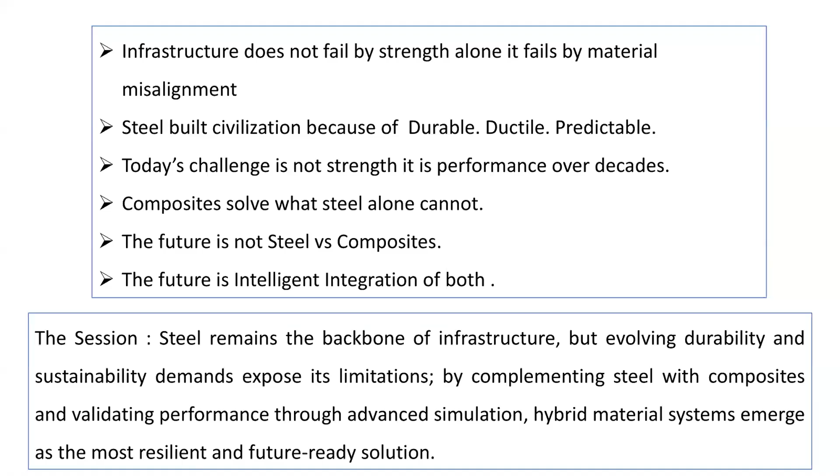So one major point we pitch for steel to be used for any project is that steel is 100% recycled material. Not a single gram of steel gets wasted, because you recycle it, you melt it. Now another dimension is added to the system, that you cannot consume more energy. So we have to consider the recyclability part also coming into the picture. So thereby steel has also taken a slight backseat when we are talking about energy consumption. Manufacturing steel is a high energy consumption activity, and the same is applicable for recycling of steel also.

So steel composite integration, we call it a hybrid system. That is the ideal solution as of now. So the role of modeling, simulations and digital tools is inevitable, and we will just touch upon the future things that are coming, or the practices advanced countries are following. In our country we are yet to catch up.

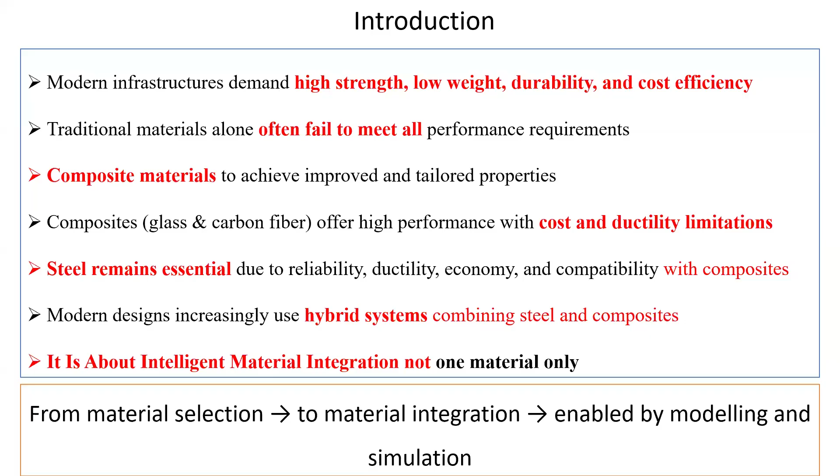So these are basically the three things you will find as durable structures enablers: the materials, the first one. Then you have to have very good design parameters, and third is the protection parameters. So all those things lead to the durability of the structures.

Now, the second one, if you see the durability with respect to the right kind of material. We only know the mild steel or the construction grades of steel. There are other varieties like weathering steels, maybe high strength low alloy steels that have higher UTS values, and those are aligned with various types of Indian standards. The mother standards are IS 2062, IS 800, or maybe Indian Roads Congress 24.

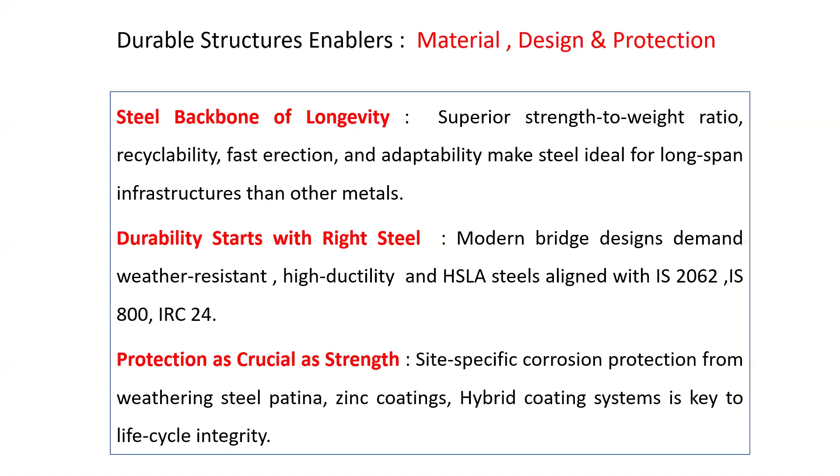So the third parameter is the protection. It is as crucial as the strength of the material, because corrosion is something like cancer to the steel. Depending on the environmental condition, you never know how corrosion is spreading inside the material, and there are cases where you can have a catastrophic failure of the materials or the structures. So these are the three things we have to consider for the durability of the structures.

Now, when we talk about the backbone of the infrastructure system, think about any landmark structure, whether it was made 50 years back or it is recent, any structure stands on these four pillars. What are these pillars? First one is the material you are selecting, or the design you are doing; it has to be very safe. That means proper workmanship and construction of the materials.

Then the durability: it has to be a good design so that whatever activity you do, you can do at ease. There are cases when you will find accessibility becomes a problem, weldability becomes a problem. So all those things are considered under that.

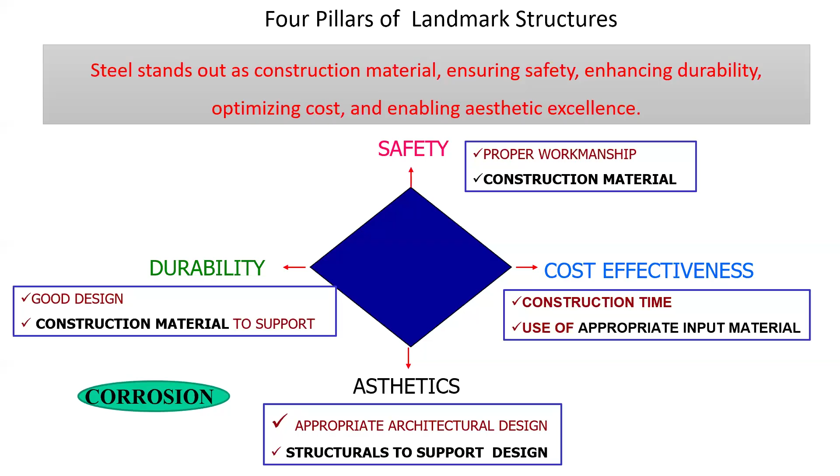And the third one, when you are going for steel-based structures, one of the prime requirements is it has to be elegant, it has to be sleek. So aesthetically it is a good one when you compare to concrete-based constructions. And the last parameter in every project is cost effectiveness. So this is how steel stands out as a construction material, ensuring safety, enhancing durability, optimizing cost and enabling aesthetic excellence.

Just a few seconds back, I talked about the Ashby plot for the optimal selection of materials. Now, this is some sort of Bible to the material scientist, because you open it and find out, because the design says that I want this type of modulus of elasticity, this specific strength. So in this chart, you will find all sorts of materials are placed. From that, you can choose the right kind of material.

Now here you can see the polymers, then the metals and the composites. In chronological order also, as the chart says, composites are at a higher level than metals with respect to certain parameters. But when you go for construction, it is not only those parameters. In infrastructure, there are other parameters that also have to be considered.

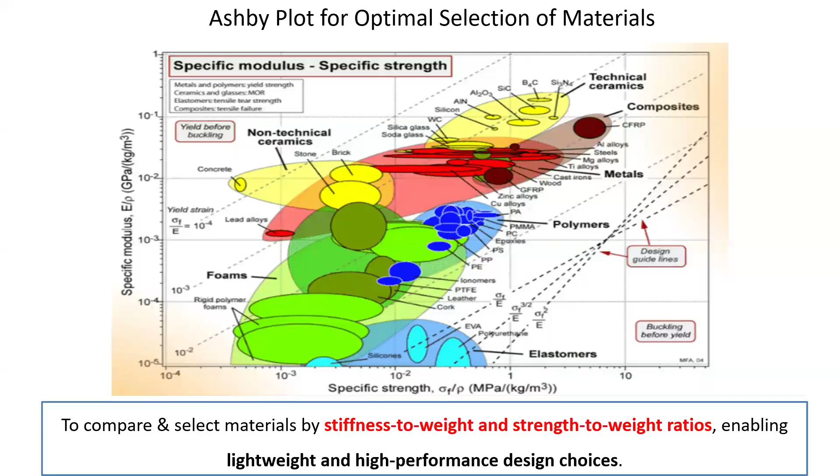So you compare and select materials by the stiffness to weight or strength to weight ratios. It is not the only criterion; it also has to be lightweight and high performance design choices. Thereby, judicious compositions of metals and various types of composites serve this type of purpose. Now all those things are done through simulation and modeling, but in earlier days this used to be done from the Ashby plots.

Now, naturally, the question can come to all of your minds: when we have a very high strength material, it becomes lightweight. Because if you see the right side, the automotive industry or the aerospace industries are using very high strength metallic materials, so it can go up to 2000 MPa.

When we talk about steel structures and infrastructures, we are only happy to use maybe 400 to 600 MPa values. Because if you go higher, then weldability and fabrication become an issue. So that is the reason it is restricted to a specific strength class. But at the same time, the moment you go for the lower strength, the weight of the structures increases.

So if there are compulsions to reduce the weight of the structures, then you have to have a mutual arrangement with the steel and the composite materials. So that's how these things are taken. So I said high strength for mobility like automotive and aerospace industries, but controlled strength for the infrastructures. The reason behind it is weldability and fabrication ease.

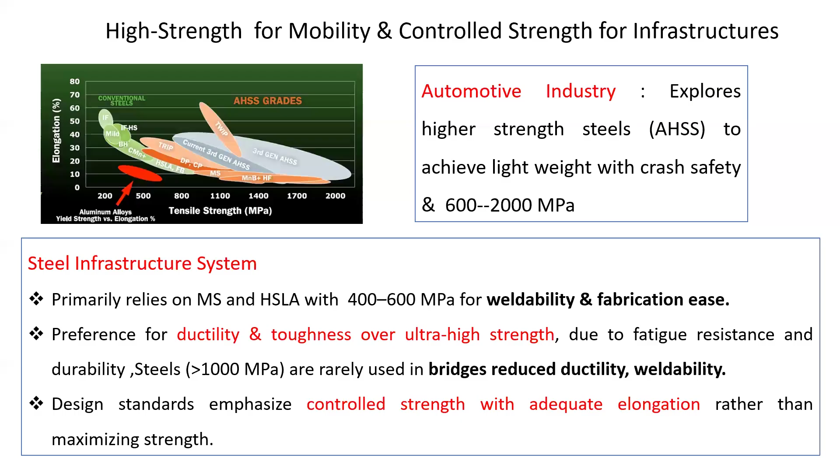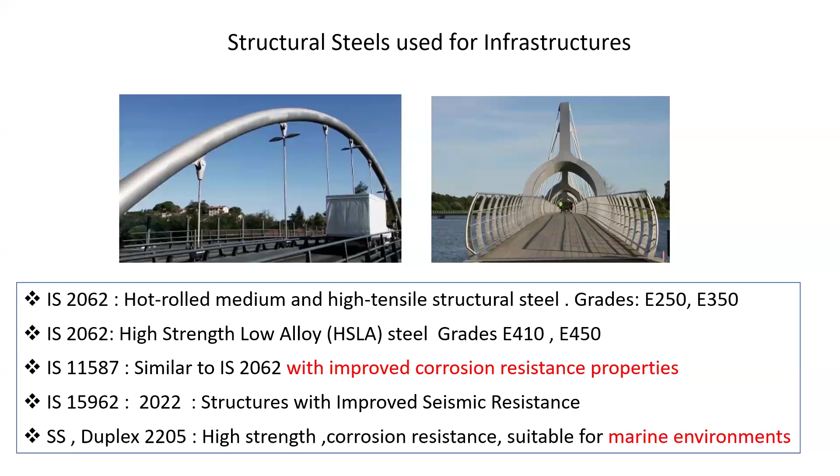Now, how are these steels made? These construction grades of steel, or any material, including the composites. You can draw an analogy: any structure you make goes through structure, property, and performance. You first know the performance the material has to give. For getting this performance, what property should the material have, and to get this property, what should be the structure? So I have just given this analogy. When you are processing composites or hybrid materials, all that methodology or philosophy has to be considered.

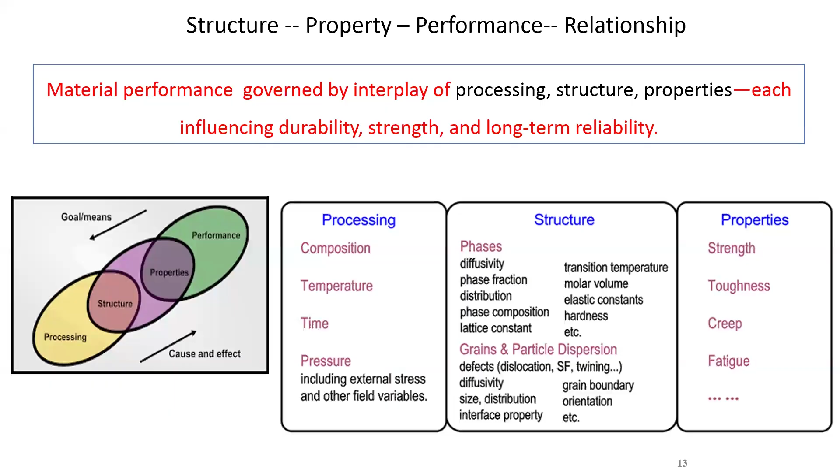So material performance is governed by the interplay of processing, what structures you achieve through that processing, and what properties you get, which leads to the performance. And that performance influences the durability, strength, and long-term reliability of the structures.

This type of information is there in our relevant codes. We call IS 800 and IRC 24 the mother codes. These are the two mother codes. I have given an extract, but nowhere does it talk about the problems present infrastructures made with steel face with respect to life cycle cost or very harsh environments. It talks about environments where you can find corrosivity categories, but not beyond that. That means you have a restricted life of the structures.

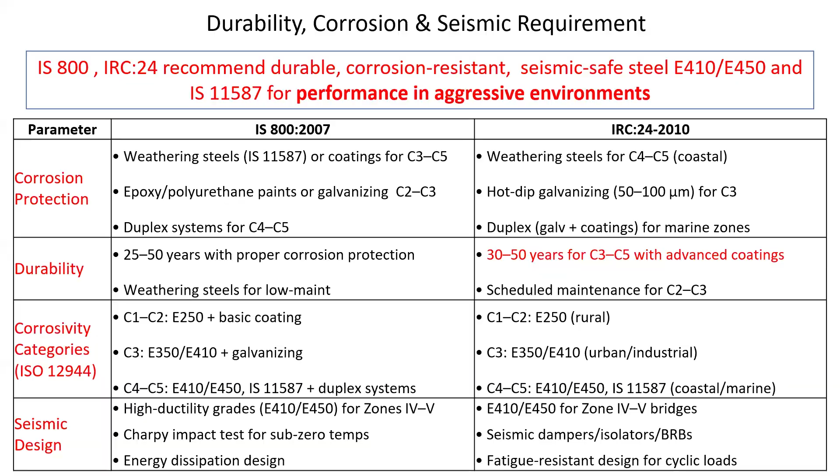So I will be taking you through various advancements where these corrosion issues have been taken care of. The high density or higher dead weight of the material can be taken care of by using various types of composites. Now, by this time you have a fair idea about why steel is used as a construction grade material, but it is not immune from corrosion. That is also known to us.

Now, let us see the performance challenges and limitations of steel structures. Steel's limitations are environmental. As I already mentioned, the material has to consume less energy, including during recycling, and it should give very high performance over a number of years. Steel cannot give all those things all the time.

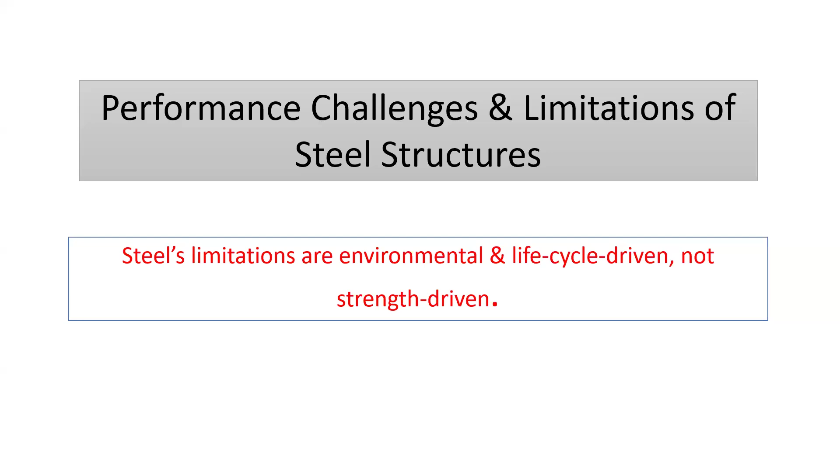So the limitations I have just noted down in one place. There are 5 to 6 major limitations the structural steels are having. What are these? Continuous corrosion from the moisture, chloride, and pollutants. That means you can ask a question: if I go for galvanized steel, if I go for galvanizing on top of that organic coating, yes, that gives a life to the structures for a limited period of time. It's not infinite.

It is not the life of the actual structure. If the steel structure's life is say 50 years, it is not giving 50 years. It may be giving 3 years to 5 years to 7 years. But after that, you have to go through blasting of the entire system, which sometimes becomes very difficult. Think about the left side images. It is made of steel, but can anybody do blasting without causing nuisance to the environment? Answer is no. So these types of challenges the existing structures are facing.

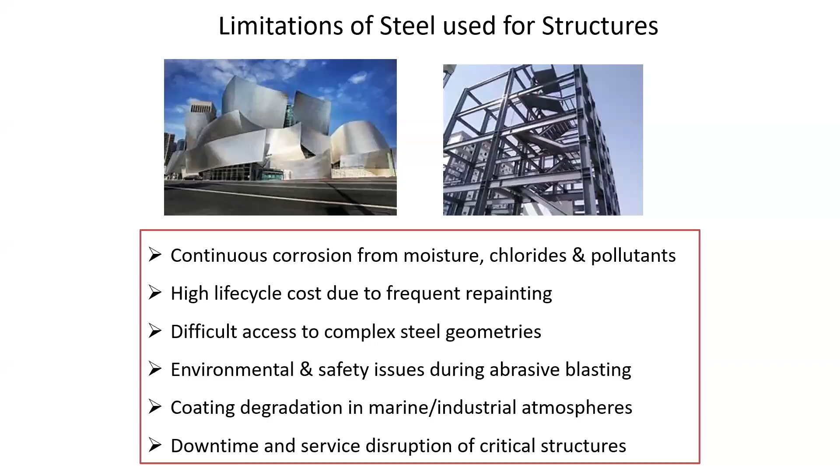So because of that, there is a shift in the thinking process, how to make infrastructures more durable, and durable for a greater number of years against a very harsh environment. The second one is very high life cycle cost, as I already mentioned, repainting, difficult access to the complex steel geometry, environmental and safety issues, coating degradation in the marine and industrial atmosphere. And every time you go for maintenance, there are disruptions or downtime of the production or maybe the occupancy. So nowadays people are very serious about all those things.

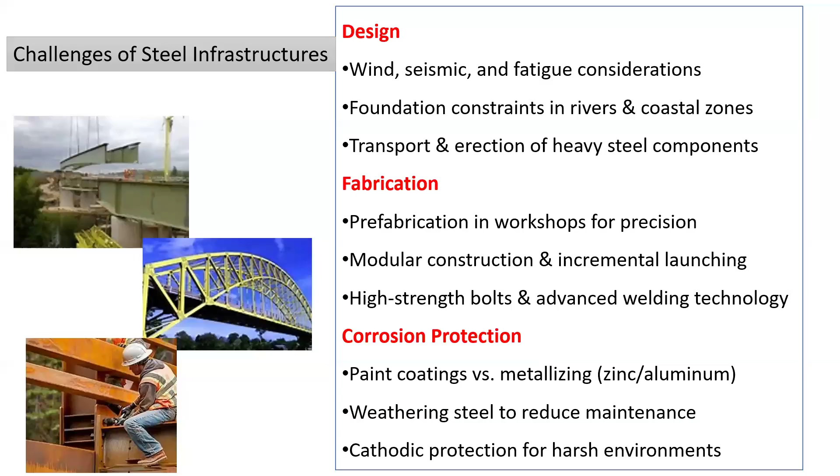Because when you see various types of complex pollutant environments, it is very difficult to address them with conventional coating systems. I mean ceramic based coatings, organic coatings, metal coatings, or maybe hybrid types of coatings. Those coatings have limited life with respect to that environment. So these are the challenges. Now, how to go ahead with that? So there are specific uses of composites, so that we get material immune from corrosion for a longer period of time, which steel alone with coating cannot provide.

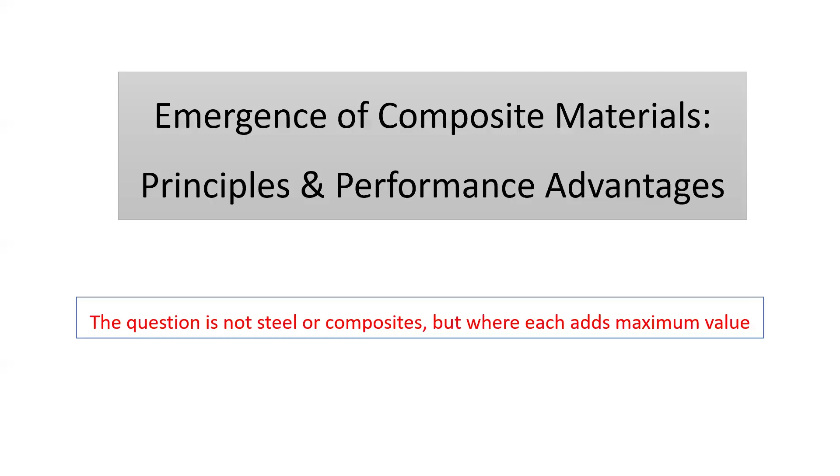So that much is about the limitations of steel. And then the composite materials. Now these composite materials are not replacing steel with the composite, which cannot be. So it is basically complementing each other so that you get maximum value in terms of the performance.

So we say it is time to look beyond steel used for the infrastructures alone. These are the points I've already highlighted: energy intensive production and recycling, escalating maintenance and life cycle cost, and highly vulnerable in aggressive environments and requires frequent inspections and repainting. So the solution is intelligently integrating composites with the steel. So infrastructures can achieve high performance and durability while significantly reducing the life cycle cost and environmental impacts.

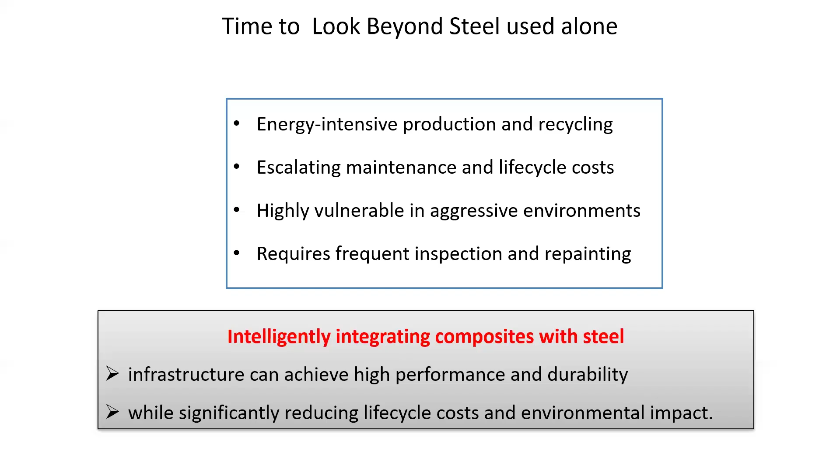Just to know a little bit about various types of composite materials. Again, I'm just giving some preliminary information on this, just to recapitulate what it is and how it is formed. Maybe a few slides may be repetitions from the last 3 days of what you have been following. Excuse me for that. So the composite material is basically an engineered material made from two or more constituents. The first constituent we call the matrix, and the second one we call the reinforcement.

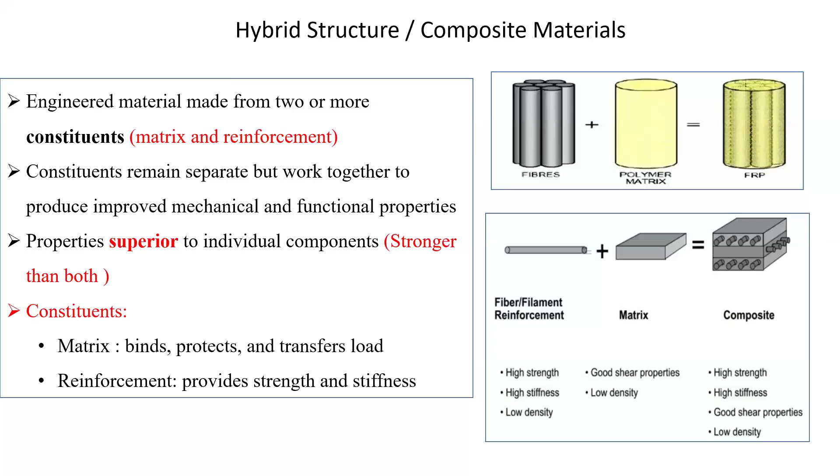So that means if you consider steel or the composites, you will find the steel as a matrix and the other material as a reinforcement. So put together, you will have better strength than the individual materials. So an ideal example is the reinforcements. Even you can see RCC, reinforced concrete. That is a very old technology, an example of composite construction.

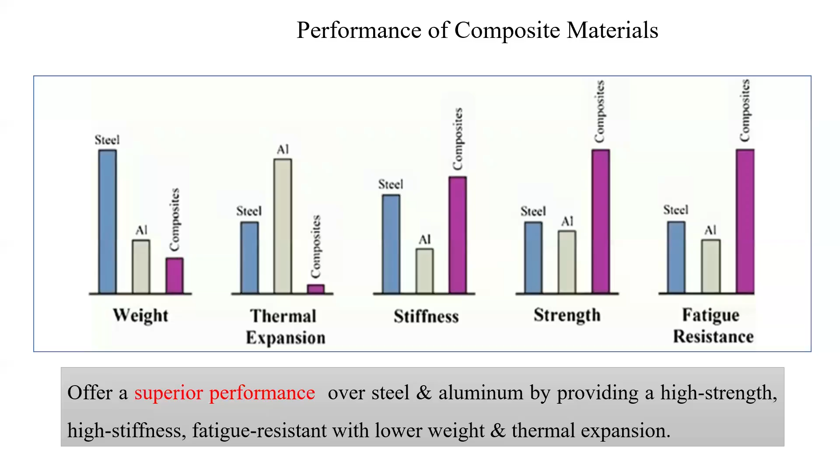Now, when you see this graph, you will understand that the two most popular metallic materials used for various applications are steel and aluminium. When you compare with some composite materials, you can see the weight, just as a comparison, thermal expansion; stiffness is very high, strength is also high, the fatigue resistance is also high. So these are some of the properties for which the composites are considered.

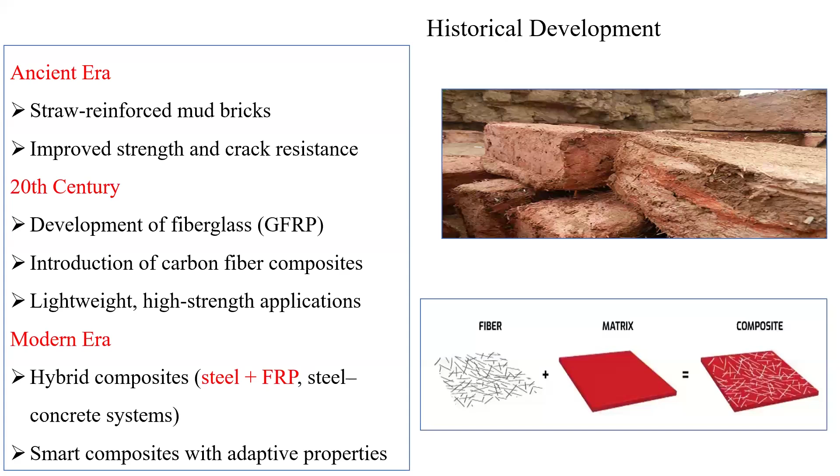Now, today we are talking about hybrid composites. That means steel and FRP, steel-concrete systems, or various types of smart composites with adaptive properties are also there. Not all those things are for infrastructure. There are various other automotive and aerospace industries where a lot of composites are used, and those are smart composites.

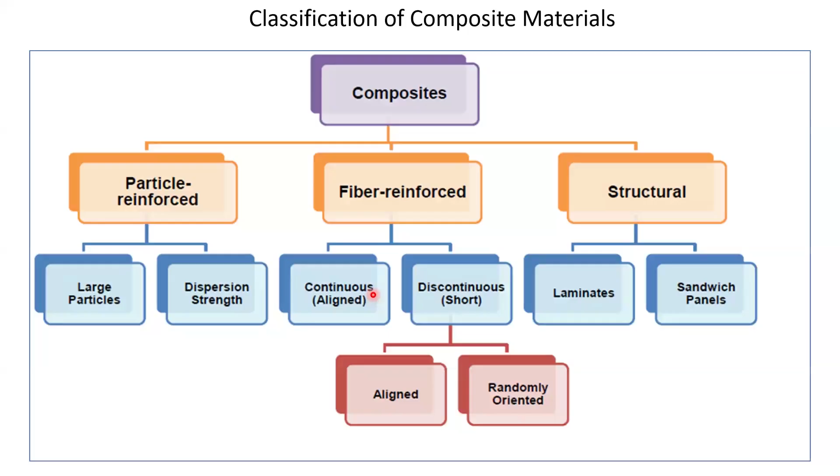The first one is a polymer. Naturally, it is lightweight, and being a non-metallic material, it has a very high degree of corrosion resistance. And being a metal matrix, you have very high strength and temperature resistance. When you are going for ceramic matrix, you have excellent high temperature and wear resistance. So depending on the situations and the applications, you have to choose the matrix for the composites. That's what you will find for aerospace or thermal protection systems. We use silicon carbide or alumina, that type of ceramic material as a matrix, so that you have a very high degree of temperature resistance.

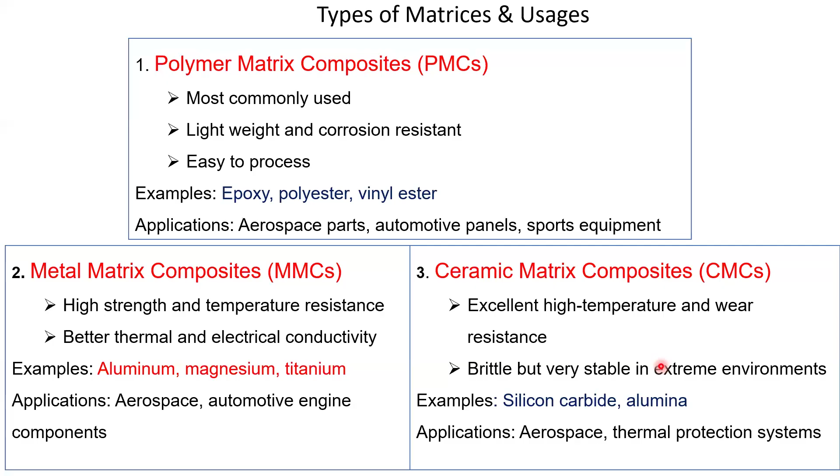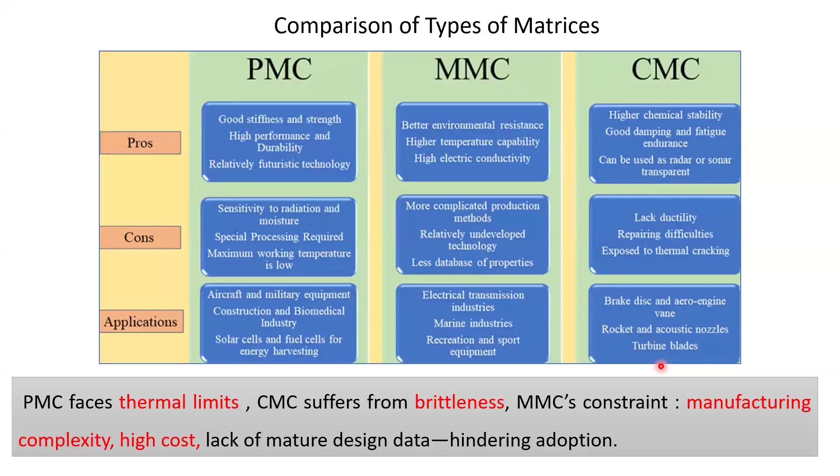So that hinders adoption, because people are always looking for identical design and manufacturing easiness, so that the material can be fabricated and fixed to the system. In the absence of both things, it becomes difficult to implement that type of technology for the infrastructures. So that part is the matrix.

Now the second ingredient is the reinforcement. What are the reinforcements? There are three types of reinforcements normally used. So this is the second constituent. We call them fiber reinforced composites, particle reinforced composites, and structural composites. As I already mentioned, the structural composites are basically sandwich panels and laminated composites. These are used mostly for the infrastructures. And fiber reinforced composites, this is again the reinforced concrete. There are glass fiber reinforcement bars.

If you search in Google, you will find in India there are a few metro railway constructions, mostly in the Delhi area, that have been using glass fiber reinforcement bars replacing steel reinforcement bars. There are certain reasons behind that, as an experiment, and as of now the structures are not stressed. But there are issues for the fabrication, and it is not very popular in our country. So fiber reinforced composites, that is one area.

The fibers may be continuous or discontinuous, but when you are talking about RCC based construction, it is continuous, because the fibers have to carry the entire strength of the beams and columns, or maybe the decks. It is basically continuous. Coming to the particle reinforced composites, it improves hardness and wear resistance. And the last one is the structural composites, built from layered sandwich structures designed for load-bearing applications.

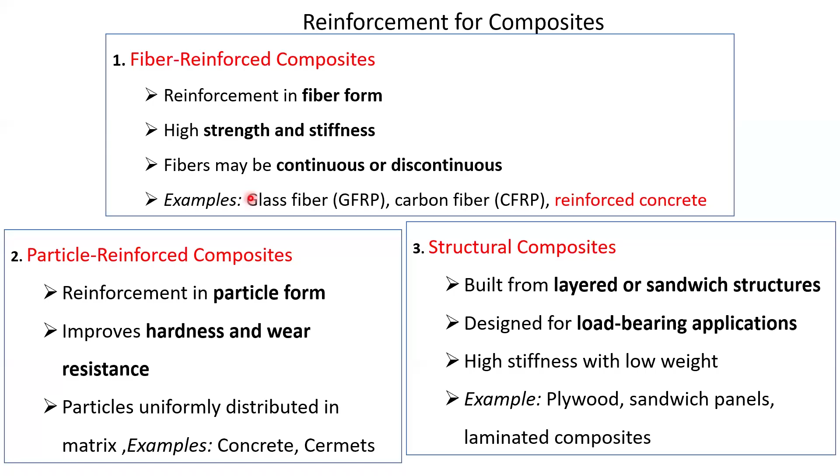High stiffness, the low weight, and this fiber reinforced component. Now you have seen the three types of reinforcement component: fiber, then particle, and then structure. If you go to the fiber, it has got again two types, as I already gave an example with the reinforcement. So the continuous fiber or maybe the discontinuous fiber, it has got its own advantages and disadvantages.

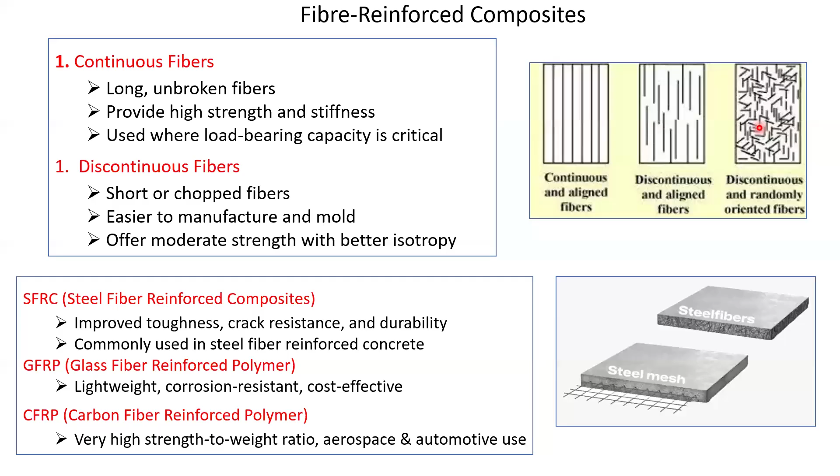The right side, I need not explain. These are self-explanatory images: continuous and aligned fibers. You can see the discontinuous and aligned fibers, and the discontinuous and randomly oriented fibers. So these are the three types: continuous, discontinuous, or discontinuous randomly oriented fiber. This also can be arranged during the manufacturing process. So you get still better property with respect to the discontinuous, because in discontinuous it is aligned. Here it is random, that means it has got more resistance, so it gives the better strength in some cases.

The second and third types of reinforcements are the particle composites and the structural composites. Particle composites, you see, provide very high compressive strength and durability. An example is the cement matrix. In the cement matrix, we give the sand and the stones. So that becomes the aggregate particles. So sand and aggregate particles and cement matrix become a classic example of particle composites.

As I said, out of these three types, the structural composites are basically used as of now mostly for buildings, bridges, marine and automotive structures, and of course for the aircraft panels. Aircraft panels means the wing and other places, we call them the honeycomb structures. There all these composites are used.

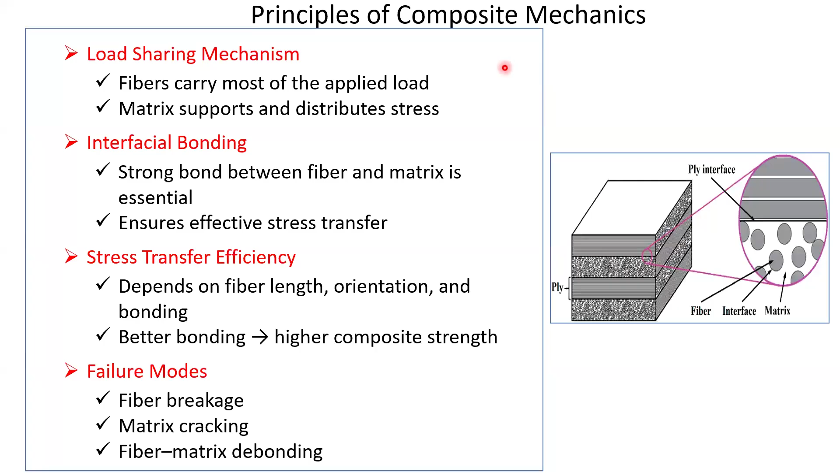So the failure modes of the composite, just now what I said, you see this is layer to layer. If the interlayer bonding is not enough, you have delaminations, you have debonding, you have matrix rupture, and others like pull out, and the fiber ruptures. In the earlier slide, what I have shown here in this image, those things have been exploded, and it is shown like this.

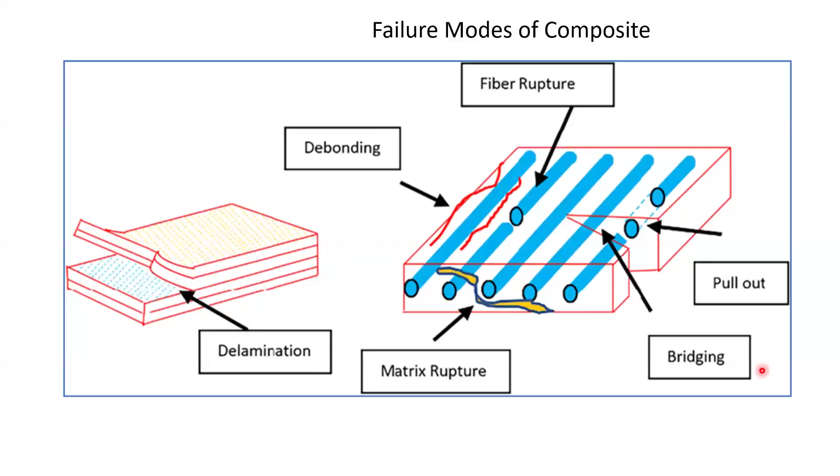As I said, the manufacturing is very difficult, just to find out its structure versus property versus performance. So it's a very difficult job to design a composite material to serve the purpose. So we always follow the rule of mixtures. The rule of mixtures is basically to predict the mechanical properties of the composites based on the properties of the fiber and the matrix. We take this type of fibers, this type of matrix, and there is a ratio of that. It strongly depends on the volume fraction of the constituents.

So it is an important tool for design and optimization of the composites, and increasing fiber volume fraction generally increases the strength and stiffness. It assumes perfect bonding and uniform stress distribution. That is also to be considered. So it is not so easy. It seems very easy: go into the rule of mixtures, take proper ratios, search the literature, put both things together, and start making the composites. Not so easy. You have to find out the optimum level where your desired properties are achieved.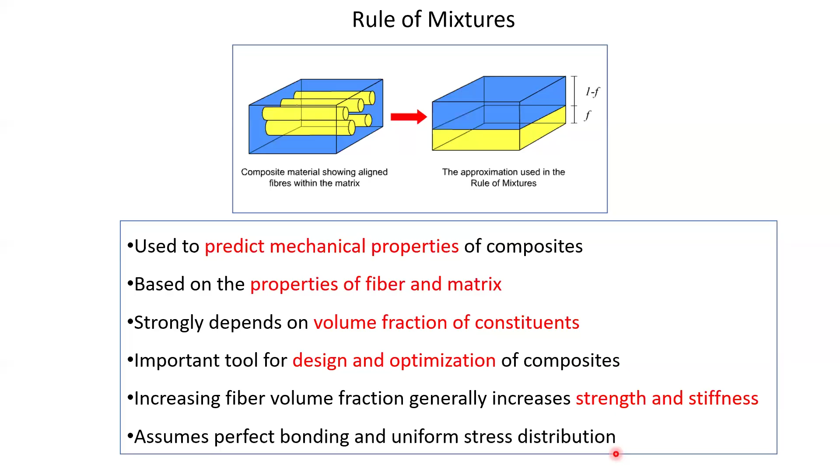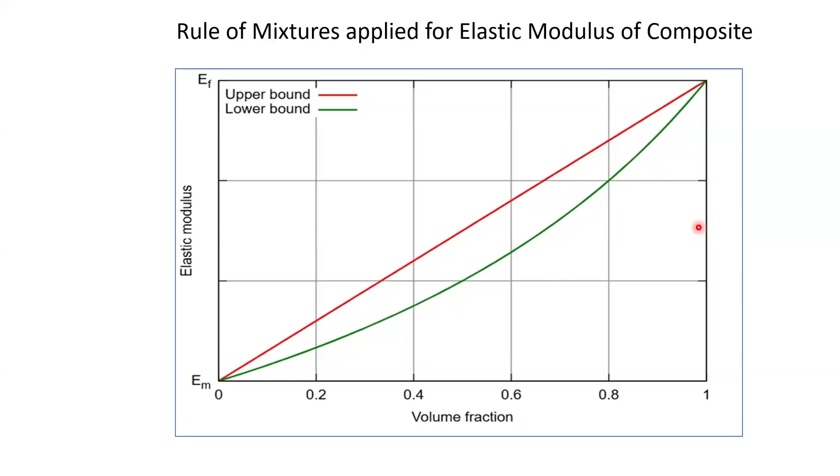Now, if I take you to the next, you will find how difficult it is; you have to continuously make these types of charts, the rule of mixtures applied for the elastic modulus of the composites. There you can find there is an upper bound and a lower bound. You have to find what strength you want and what elastic modulus you are achieving at that point. Depending on that, you have to do continuous experimentation to finalize the rule of mixtures. That means what should be my ratio of matrix and reinforcement, and then other parameters come in: what is the strength, what type of reinforcement I have to provide. So making all those things into a system is very complicated.

Now, if you see this, as I said earlier, there are three types of composites: the PMC, MMC, and the ceramic matrix composite. If you compare with conventional materials, the temperature capability increases from polymer to ceramic. As I said, in the ceramic you have a lot of ceramic materials, and due to those ceramic materials, the temperature retention is very high.

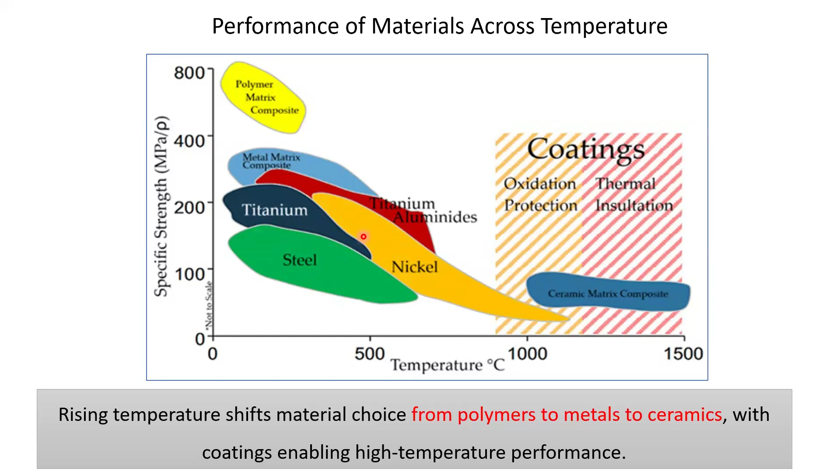So this is another chart from where you will find the specific strength of the material at elevated temperature. Steel loses its elevated temperature strength the moment it crosses maybe 450 to 500 degrees centigrade. Thereby, to retain strength up to 450, you need a fireproofing coating for the steel. But when you develop a component in such a way, that type of coating may not be required, because the composite takes care of that part. The same logic goes for various types of analysis. I'm just giving some of the idea behind composites.

When you compare life cycle cost for a 20-year projected life, you can find that initially the composite cost is higher, but at the same time installation cost is lower, maintenance frequency is reduced, so maintenance cost is low, and the replacement and downtime cost is almost negligible.

So thereby it scores over the steel based constructions. And the same way, I have already mentioned why the Delhi Metro has used it, and the answer is here: the glass fiber reinforced polymer reinforcement bar is used because it emits low CO2 during manufacturing. So that is the reason, and it has other advantages. Though joining was the issue, there are various systems through which you can join reinforcement bars continuously one after another, so it becomes a continuous reinforcement.

So it shows significant reductions in CO2 emissions when GFRP is used, particularly at the optimized spacing. This is again some analysis I have taken from the internet, and that report says this is the reason for this.

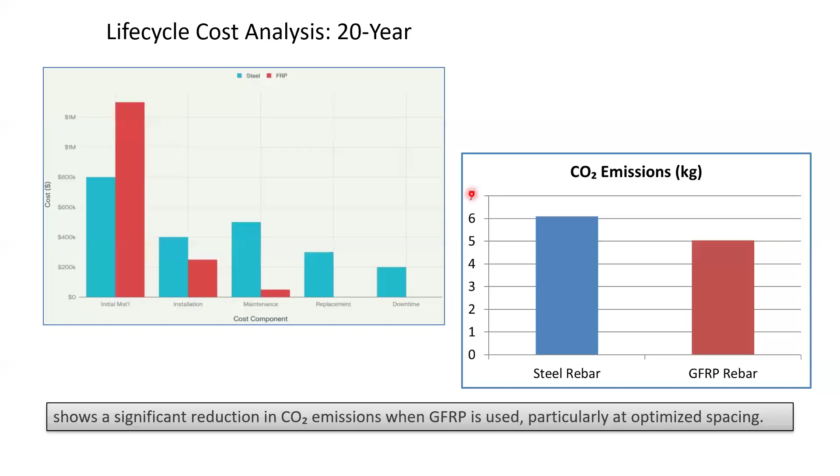So just to summarize this composite part with a few slides, then we will go to the hybrid systems. This composite is stronger than metals for the same weight, which you have seen in the earlier chart also. It has resistance to corrosion and environmental attack, is lightweight for design efficiency, and maintains performance under repeated loading, meaning it has better fatigue resistance. And on the right side you can find various types of reinforced composites with respect to steel and high strength steel.

So this is again one of the equations: FRP plus steel equals lightweight efficiency with ductility, safety and long-term durability. So this is how you can compare; the FRP, fiber reinforced polymer, is always better with respect to steel and aluminum.

So these are a few charts I have put. This is not to be discussed much. The only thing is the advantage of the composites, FRP. If you see this, with respect to corrosion resistance, yes, it is good. Weight, yes, it is good. Strength to weight ratio may be higher than steel. Installation time and cost, maintenance needs, lifespan, thermal conductivity, design flexibility, and environmental impact. In all these areas you will find FRP is better than conventional steel,

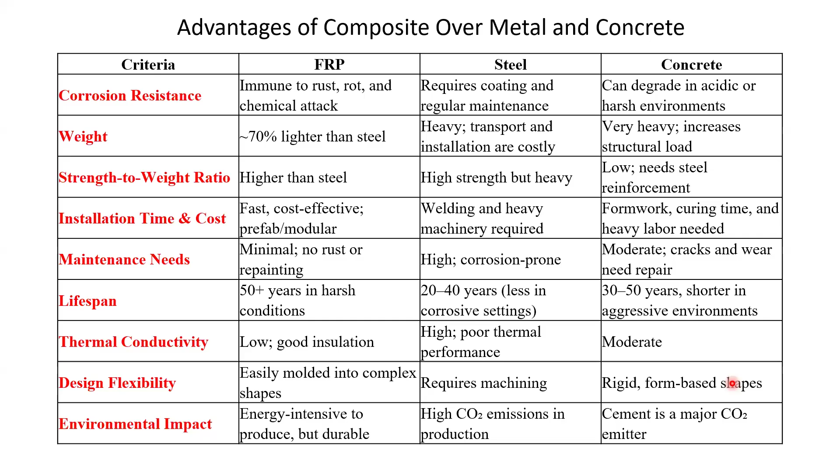but the only thing is the manufacturing part is an issue. And in industry, in all these calculations, people are only seeing the cost of the material. If the cost of the material is higher, people don't consider the hidden cost. In our country we are still not adopting life cycle cost analysis as the basis for selecting material. In life cycle cost analysis you have to consider each and every aspect: the cost to society, the amount of energy it consumes, and when it goes into recycling or dumping, what difficulty it gives to society. All those things are calculated. There are no regulations to consider it, but as of date it is a good idea to go for it whenever possible.

So again, I've already talked about the energy absorption capacity. In the right side photograph you can find steel connections versus GFRP connections. The energy absorption capacity gives better protection in seismic applications. The material can consume more energy; it can take more shocks. So for seismic zones also, these composites with higher energy absorption capacity than steel can be used for components in areas that need that type of support. So for seismic resistant structures abroad, people have started using various types of composites to take this type of advantage.

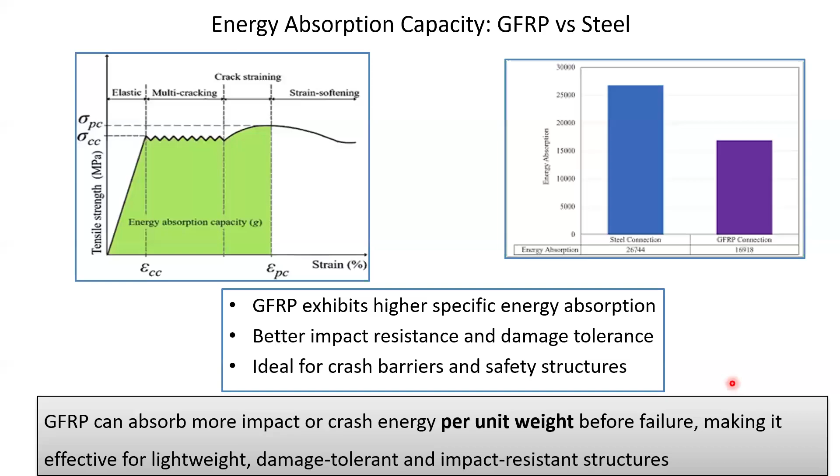On the left side you can see some of the engineering applications where composite materials are used: high performance resins, adhesives, carbon fiber based materials, lightweighting, advanced polymer composites, biomaterials, nanocomposites, smart metal composites, additive manufacturing, circular material economy, and intelligent design manufacturing. So I'll just keep this slide for 30 seconds. Just go through it, and then I will go to the next one.

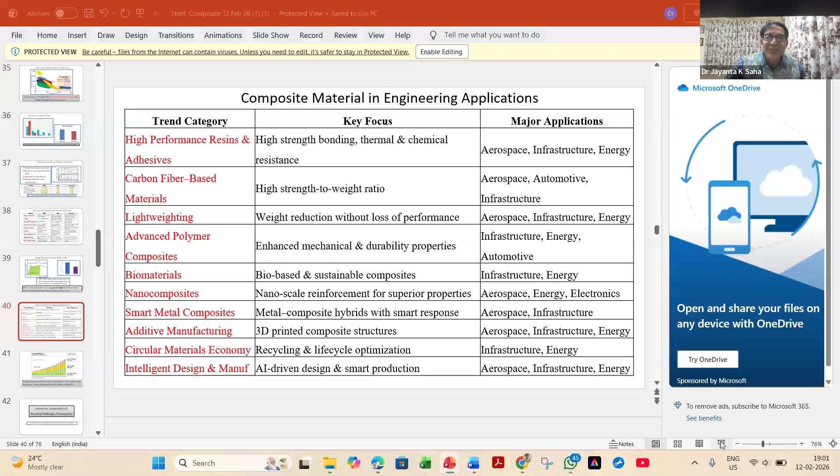problems... If you talk about infrastructure, yes, there are areas like crash barriers for all the national highways. It is not only steel, because steel has got its advantages, but non-metallic materials made with composites are also a part of crash barrier systems, so it gives better performance in case of casualty. So people have started using it in these types of infrastructure areas, but not in high intensity.

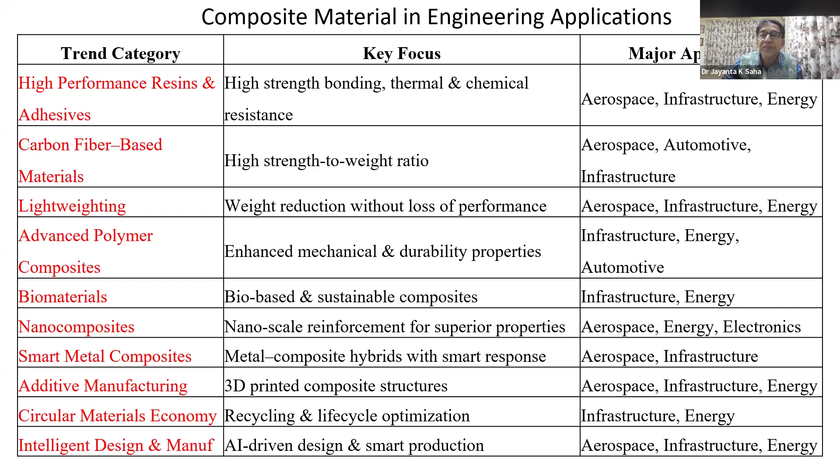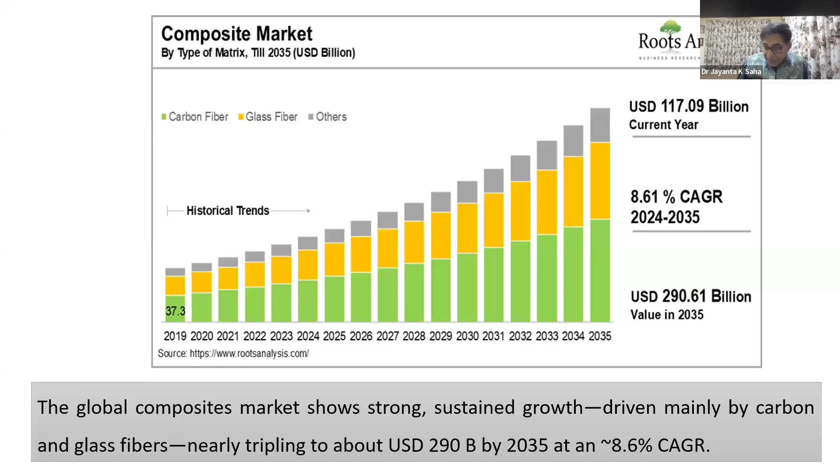Now, we talked about so many good things about composite materials, but yes, there are certain drawbacks in composites. Maintaining the high performance brings new challenges. What are the challenges? I think somewhere I mentioned that recycling is an issue for composites. Now, number one is the cost. The manufacturing cost is very high.

If you're going for very high-end, high performance composites, there is the complex manufacturing process, and inspection difficulty: detecting internal defects or micro cracks is harder than in steel structures. So the inspection methodology for composites in service is also evolving. But in steel, various types of gadgets are available. Through that, you can detect, like

in RCC based structures, you can find out, you can repair it, or even steel structures. You can do in situ metallography. You can check various types of mechanical properties, and you can provide suitable retrofitting of the system. But in composites, yes, those are the areas still being worked on.

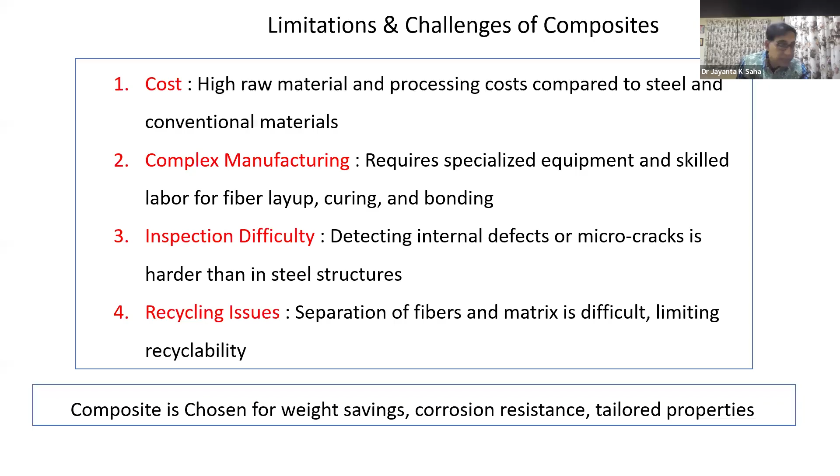But the bottom line is that composite is chosen for the weight savings, corrosion resistance, and to give tailored properties. Because of these three major criteria, composites are still used, though they have about four limitations. So I call it a paradox. It is a very good thing; it provides high performance, but at the same time it produces waste which basically cannot be recycled.

The lower embodied energy and carbon footprint are the positive points: high strength-to-weight ratios, good corrosion resistance, reduced maintenance and extended service life, widely used in infrastructure, transport, and renewable energy. But thermoset composites pose serious end-of-life challenges, and the global GFRP market is growing, as you have seen in the earlier slides, up to the projected figure for 2035. And wind turbine blades are the major contributor to composite waste.

In India there are not many wind turbines; there are 2-3 companies that manufacture for Indian installations. But in developed countries, in Europe and America, there are a lot of wind energy installations. I have some figures on how many wind turbine blades will be discarded by the middle of this year, and there are limited recycling routes for thermoset composites.

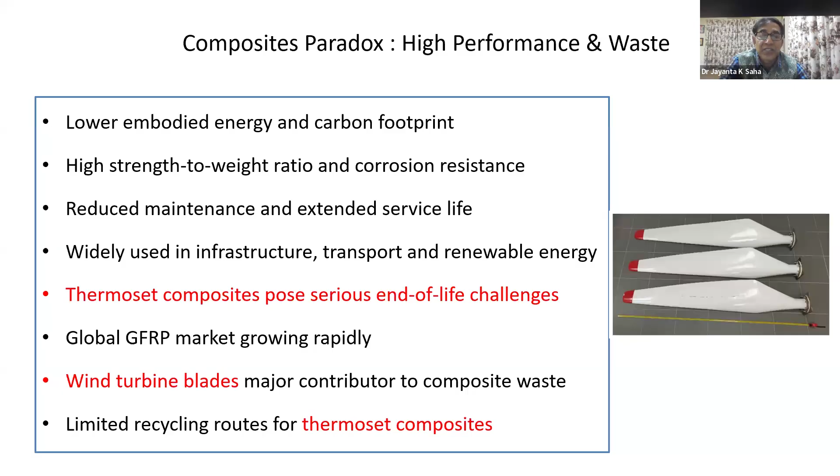So on one side it is good, but at the same time there are some issues. For that, the technologist has to think it over. Should we use it further unless we find a proper solution for the recyclability of these composites? Should we go further or not? So that is a question.

So the challenges: thermoset polymers are cross-linked and non-meltable. That is the key word, non-meltable. Conventional recycling routes used for thermoplastics do not work. End-of-life management remains a major sustainability issue, and the market projection you have seen earlier. And now this is the figure I'm talking about: 19,000 wind turbine blades are expected to be retired by mid-2026, because they have a fatigue life.

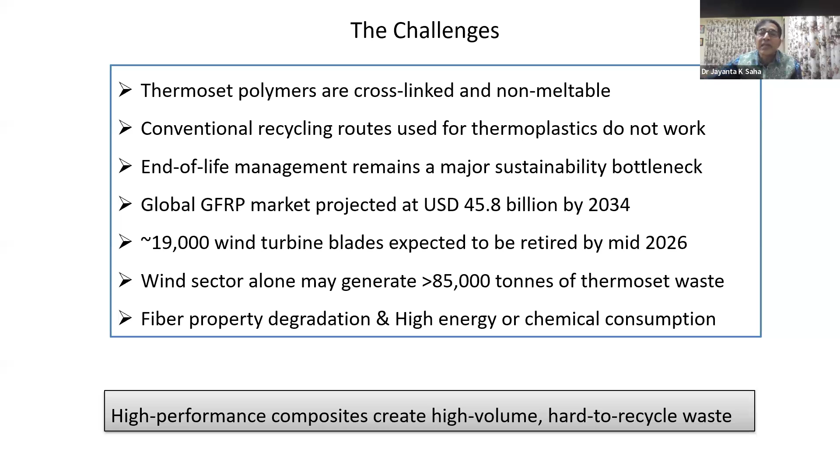The fatigue life is so many lakhs of cycles. The moment it is completed, because of the safety requirement, wind turbine blades have to be discarded. And it creates huge waste which cannot be recycled. The wind sector alone generates 85,000 tons of thermoset waste. So this is the issue, and we consider this a challenge for using composites. Having said so, this type of material cannot go directly into infrastructure.

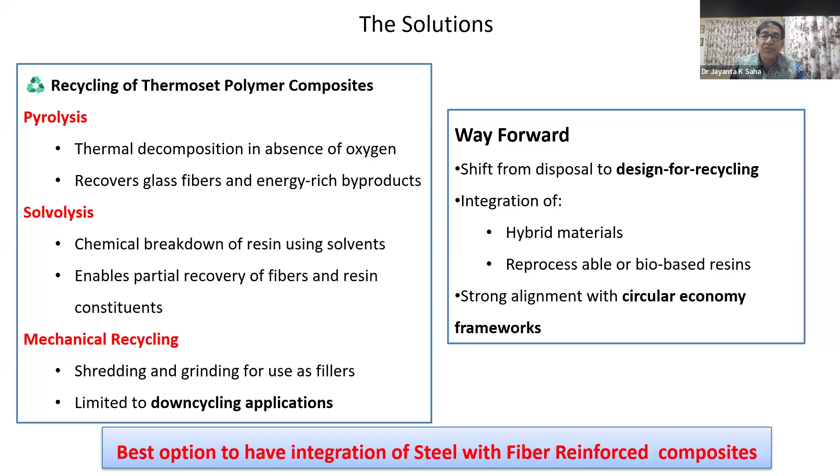Now, the solution is that there are very costly recycling processes industrially, but they're not at commercial scale. We call them pyrolysis, solvolysis, and mechanical recycling. But there are issues with these. When you compare with steel, it's highly recyclable, but again, energy consumption is an issue. Composite recycling: these are the challenges.

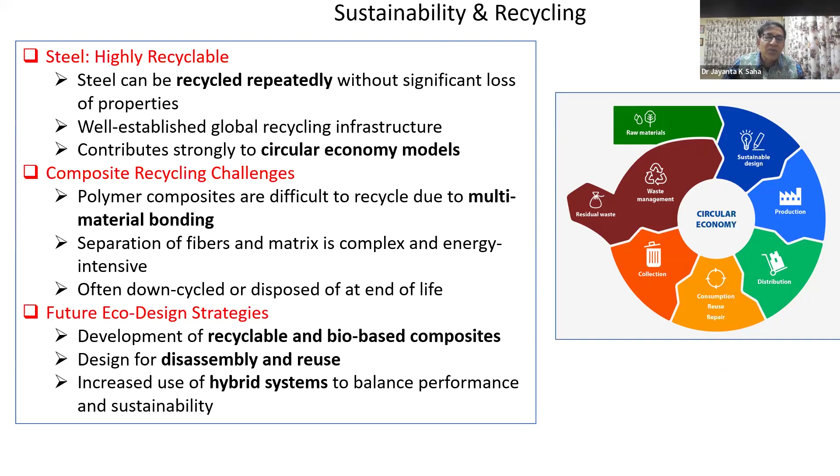Now, this is the area where I said it's a very complex process. There are two ingredients and so many parameters, and you have to see that it matches steel and at the same time overcomes the difficulties steel has. So the system becomes very complicated. The role of modeling and simulation is a must for this type of situation.

And more so because in conventional metallic materials, or maybe other materials, you have isotropic properties. But composites are anisotropic in nature. That means direction-dependent properties: mechanical properties like strength and stiffness vary with the fiber orientation.

And again, the advantage is in the tailored design: in a specific direction you can provide more loading, which you cannot do, maybe, in the axial direction. If you want more loading, you cannot do it with steel or aluminium. But there are challenges. So careful considerations, calculations, and simulations are needed due to the non-uniform behavior. So this is the basic reason why simulation and modeling is a must for designing composite materials, because of the anisotropic material, and we want to have tailored properties with respect to the axis. That also is possible through this type of process.

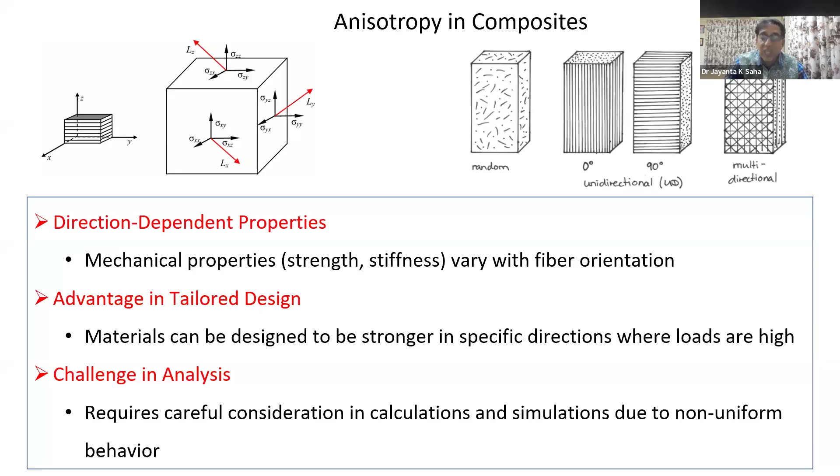Now, I have not done any work on the modeling. Just for the sake of this, I'll give you some idea about it, because you have other sessions where you are listening to experts on how the simulation model works, how they are validating, how they are doing digital twinning. So I'm just giving an idea of why modeling and simulation is a must for composite materials, as I said, due to the anisotropic behavior of the material.

And experimental testing alone is very expensive. That means if you make the design, then do the prototype in the conventional way, test it, and it fails, you go for the second one, the third one. It becomes very laborious, time intensive, and costly experimentation. So modeling enables virtual material characterization, performance prediction, and design parameter optimization. So it is essential for modern engineering and certification that modeling and simulation of composite materials is a must.

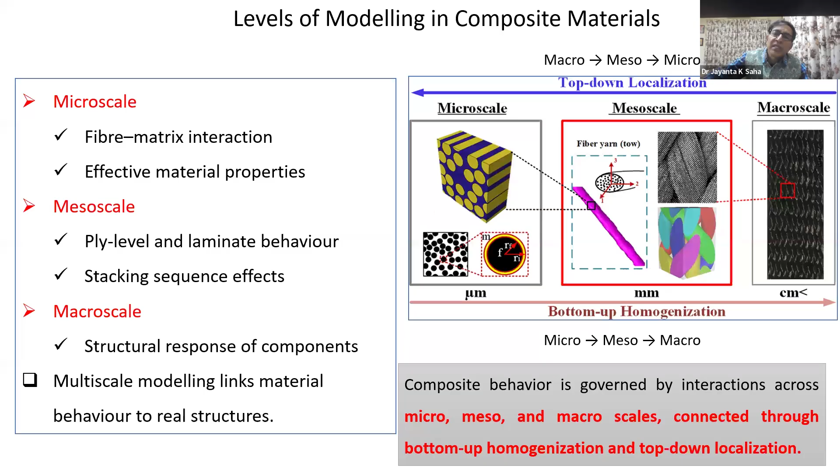So there are three ways to do it. We call it the level of modeling. There is a micro scale, a meso scale, and a macro scale. The fiber is micro, the ply level is meso, and when we talk about the laminate level, the structural response of the component, we call it the macro scale. So composite behavior is governed by the interaction across micro, meso, and macro. All three are part of the composite materials, connected through bottom-up homogenization or top-down localization. That means you can go from left to right, or from right to left during the modeling stage.

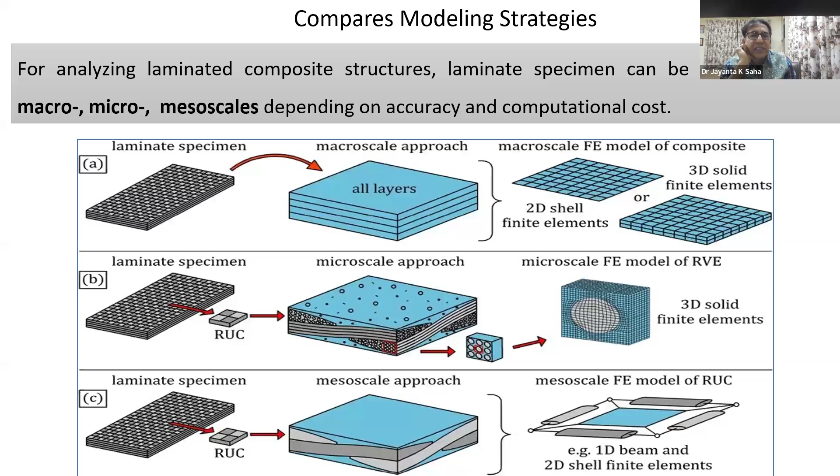So this is the same concept. I just put that photograph here: micro, macro, and meso. So this is not much to be explained here; it's the same thing as the earlier slide, how it is done. This is a 3-stage, and then we have multi-scale. When you are taking them individually, you can have micro, macro, and develop the product through modeling top to bottom and bottom to top, as I said. Or you can have all three together for the best performance. The macro scale gives values at the structural level, the micro scale is the constituent level, and the third one, the meso scale, is the ply or yarn level. So all three can be run together.

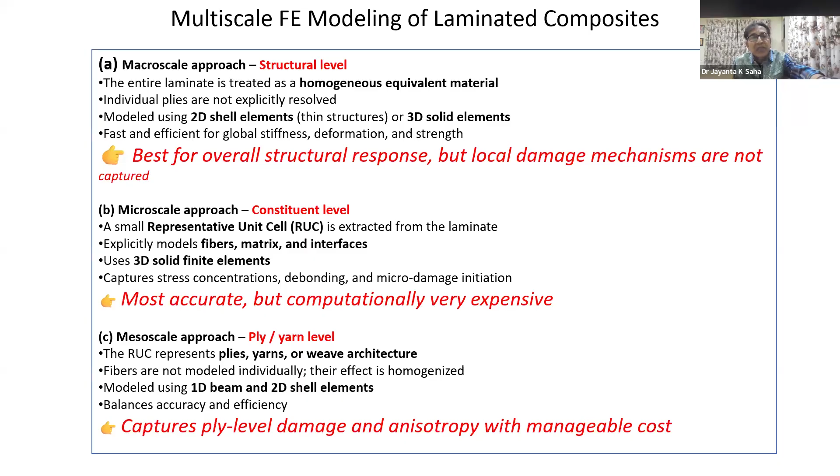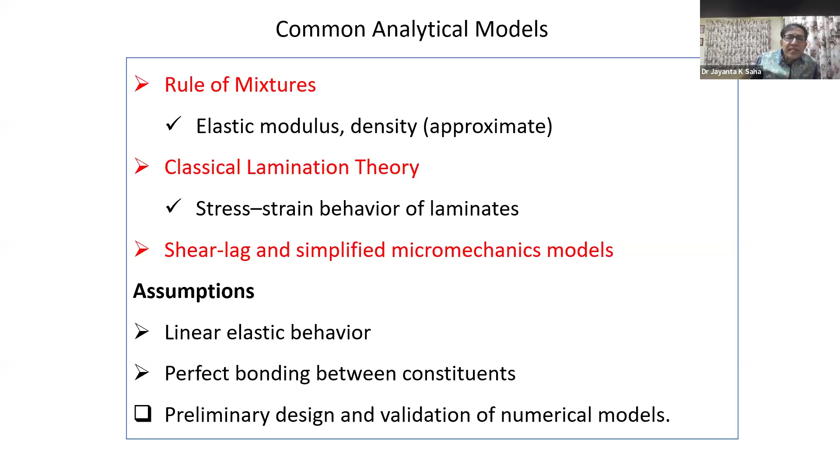Various types of software are available for this, and I'll just show you. Maybe it is not the one a lot of people are using; there may be some others also. So the common analytical models: the rule of mixtures that we learned about, classical lamination theory, shear lag, and simplified micromechanics models. These are some of the things I found in the textbook, and then there are models like finite element analysis. Then you have to find out the failure criteria and the common software tools. This is some of the listing I have provided, but I have not done any hands-on work on this.

For the sake of this presentation, I thought it was worth mentioning what types of software are being exploited, and at the same time what types of failure criteria, as we have seen that if the proper matching of matrix and fibers, the reinforcement, is not there, you come across various types of failure: matrix failure, fiber or reinforcement failures, interbond failures. So all those things can be captured visually through the failure criteria using this type of software.

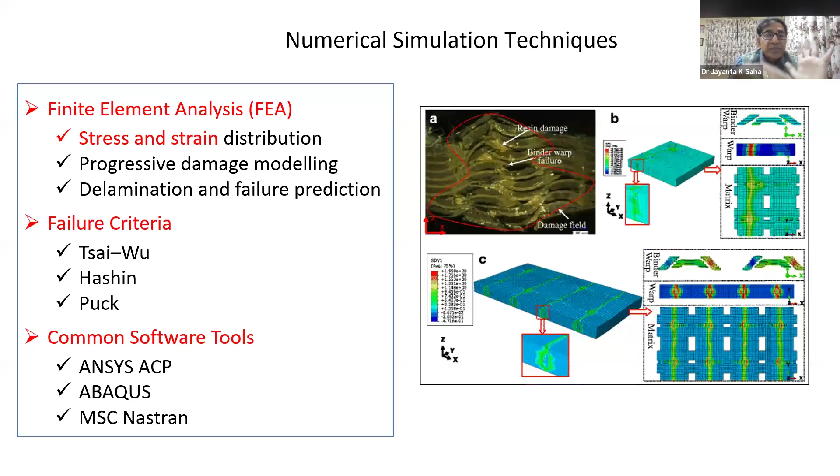So this is again some of the photographs, nothing to be mentioned. Simulation of the woven composite, I got it from some source. So this is some of the simulation technique.

Twinning, you all must be knowing digital twinnings. Earlier days in our time, we used to make prototype. It takes a lot of time. Now through this 3D printing or maybe the various type of digital platforms, you can make the digital twinning. I find some of the good slide. It says that 5,51,000 twins have been made by this one of the companies. For these various type of structures, components, very complicated components, and the prediction of the failure, they made the twinning.

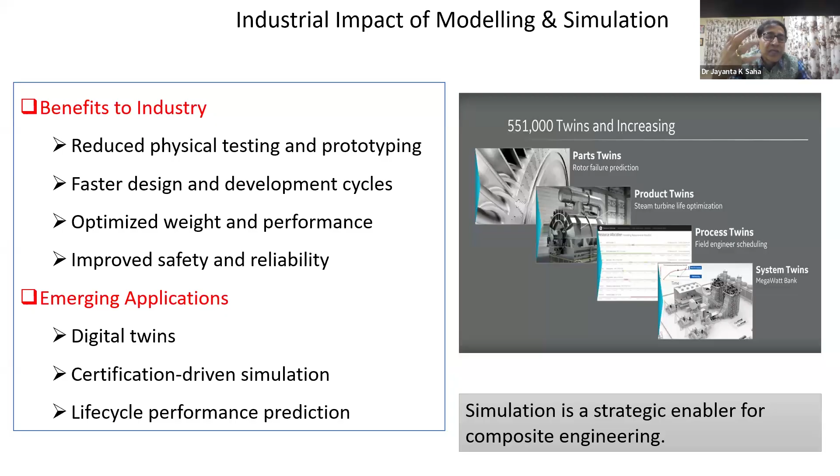And this is just to give an idea that the simulation is a strategic enabler for the composite engineering. I call it that unless otherwise you have this idea about that, it is very difficult to develop and go further. Now, the last part of this is steel composite integrations, hybrid systems. We'll go through this.

So in composites, we have found disadvantages. So we switch over to the hybrid systems as a practical solution. So there is steel as a reinforcement. You can use that. You have seen that as RCC. There you can use the fibers, reinforced fibers, steel fibers also can be used, various type of decks and the floors, or maybe reinforcement bars. So you call it as steel as a reinforcement.

Steel as a matrix: steel can also act as a matrix phase with other fibers. So ceramic and polymer can be embedded in the steel using the metal matrix composites for high temperature and high strength applications. And steel in hybrid systems, that is polymer and glass, allows tailored properties, basically balancing the weight and the mechanical performance. So there are 3 ways the steel can be used for the composites: steel as a reinforcement, steel as a matrix, and steel in the hybrid systems.

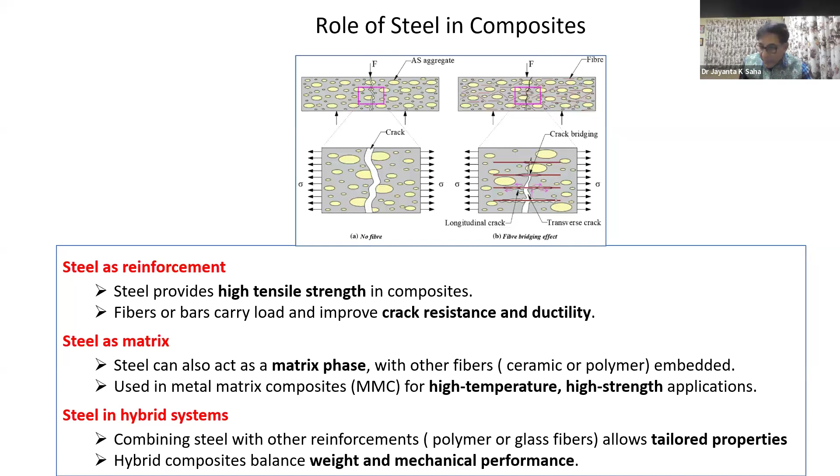Already I've discussed in case of the reinforced concretes, or when you are using fibers, or when you are using wire meshes, the micro cracks can be prevented from extending. If the crack is there, it remains at that point for a longer period of time, unless otherwise the stress level is increased. And the high temperature capability also increases when you add different types of fibers in the steel.

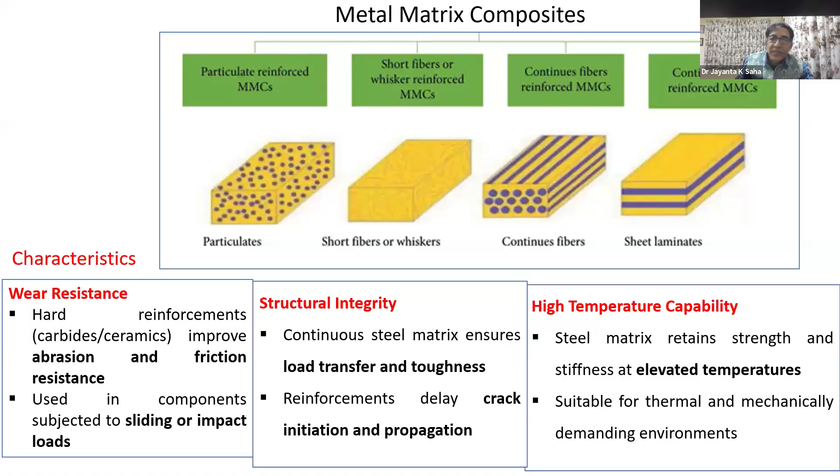So this is how on the right side you can see the stackability. So you can have a steel and then you can have a fiber. Right side image you can see those things are mentioned. So depending on the type of property you are looking for, the stacking can also be arranged with the laminar, or a situation where you have a lot of corrosivity problem, you can have the fibers at the two ends. So I'll show you another figure. There you will find fibers at both the ends, which prevents the corrosion even in very harsh environment. So this is how the materials are selected.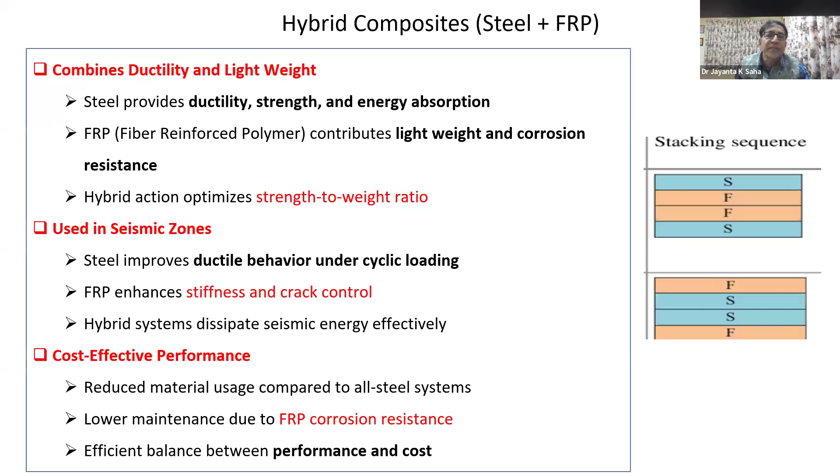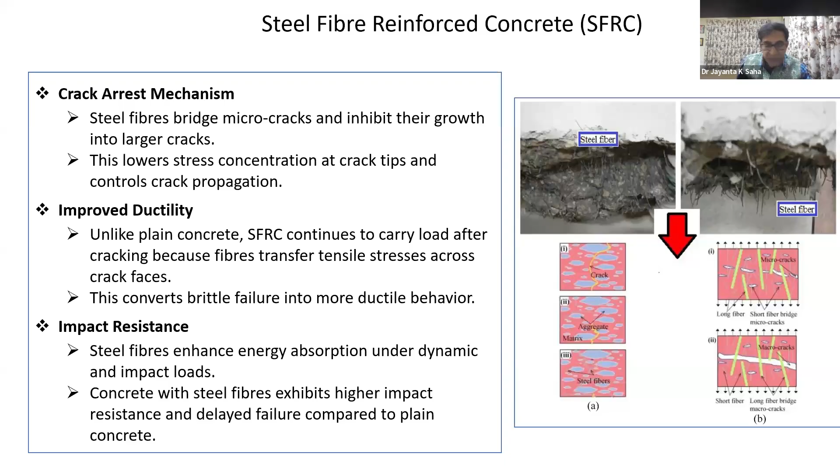This is again a conventional steel fiber reinforced concrete. You can see that this type of steel fibers are there, and these are the advantages: the crack arrest, improved ductility, and impact resistance. I'll not read all those things. Here again, I'm giving for your reference.

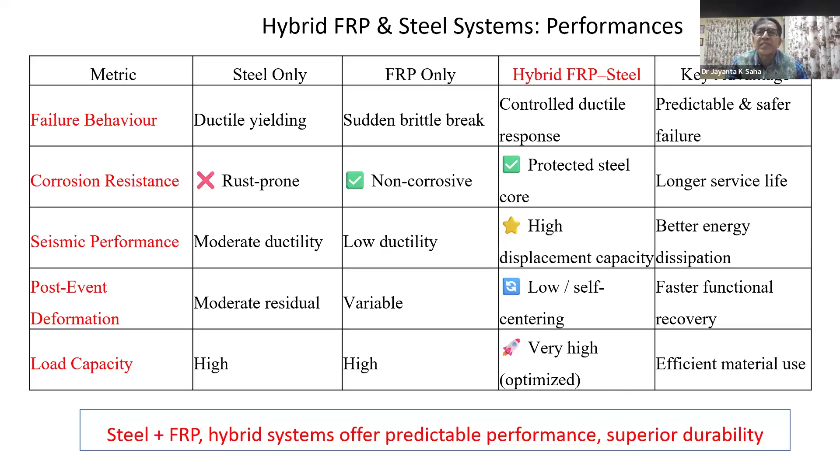I believe this presentation material you will all receive. So I just try to put all this information in one place so that whenever you feel, you can just refer those materials in one place. So I request the organizers to share this presentation to all of you who are listening, because not all the slides I'm going line by line. It is self-explanatory: hybrid FRP and steel system, the performance at a glance.

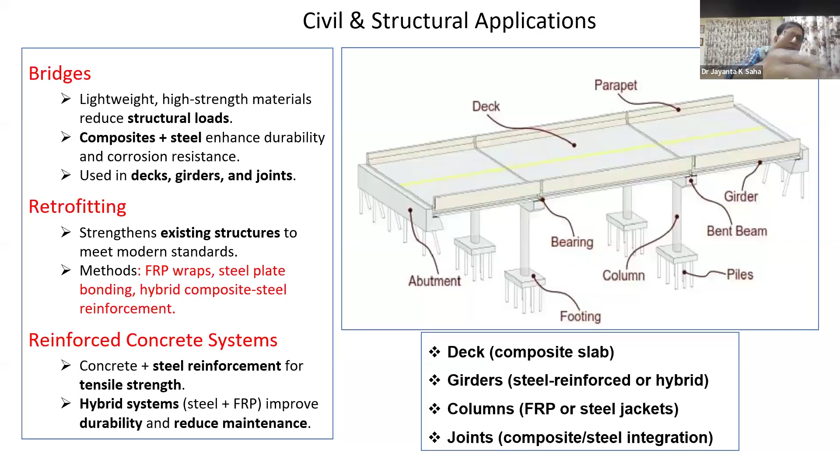And steel sandwich panel system. This, of course, is used in our country. So this is again in civil application. You can see that the deck is made with composite slabs, and the girder, the steel reinforced or the hybrid. So in all those areas you will find bridges, retrofitting, and reinforced concrete systems.

In this one you can see that the FRP fibers are on the outside. This cross section is shown. Inside is the core, and the concrete is filled inside, so the concrete takes the compressive load. The inner steel tube provides the primary load bearing, and the outer FRP jacket gives confinement and durability

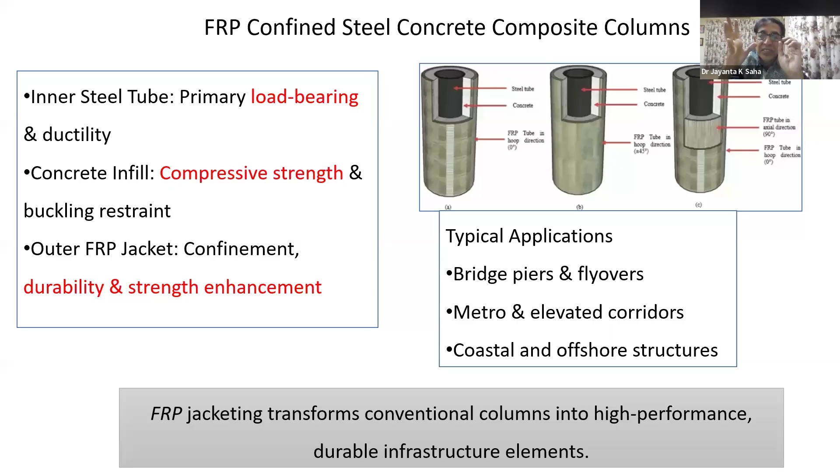and strength enhancement. You have seen that in metro and elevated corridors this type of construction is preferred. So you can have concrete-infilled steel tubes covered with FRP jacketing. This is the type of infrastructural use we are talking about. Also, depending on the FRP fiber orientation, whether 0 degree, 45 degree, or 90 degree, the load carrying capacity changes.

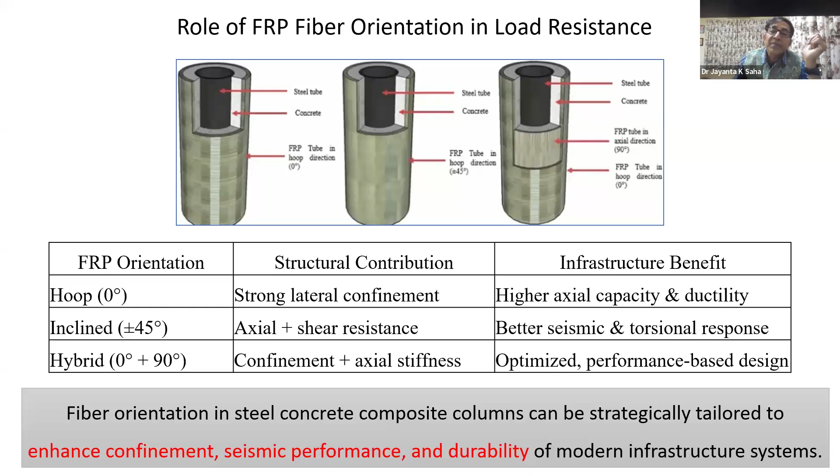This is a composite polymer. This is again some of the analysis. I'll not go into this.

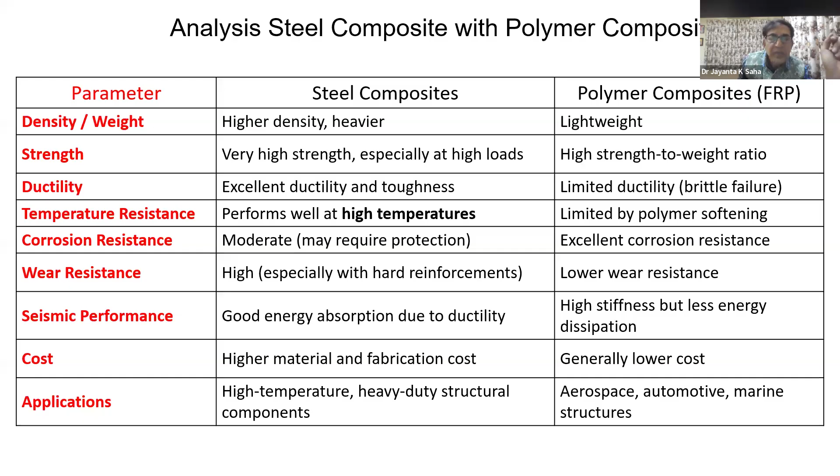So, the last few slides: the way forward and future of infrastructure materials. So far, what we learned is that it is not only steel, not only composites, that serves our purpose when we think about high service life, freedom from downtime, materials which emit a lot of CO2, or materials exposed to a mild corrosive environment today that tomorrow will face a very severe environment. That type of process has gone.

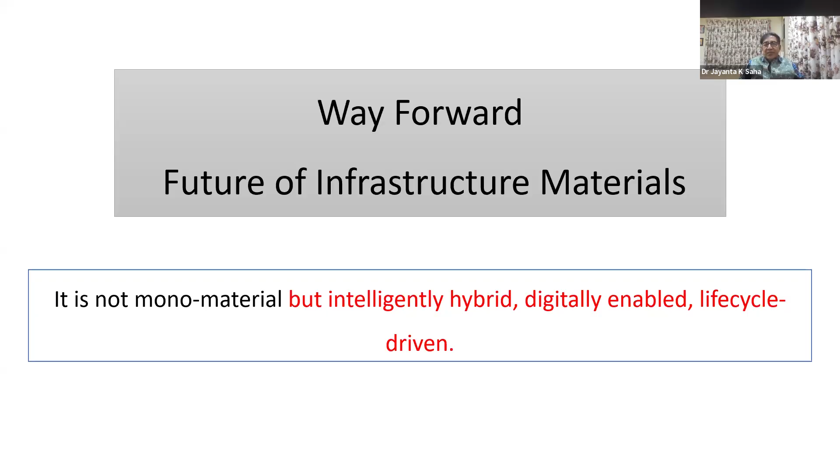So it is not only one material, a mono material; it should be intelligently hybrid, and that material has to be digitally enabled and life cycle driven. That is the key today. Various processes exist in industrial applications: advanced joining, interface technology, hybrid structures and functional systems, incorporation of smart and adaptive materials, AI-driven design and engineering optimization, digital twins and predictive engineering tools, and machine learning for performance and life prediction. These are some of the 6 areas.

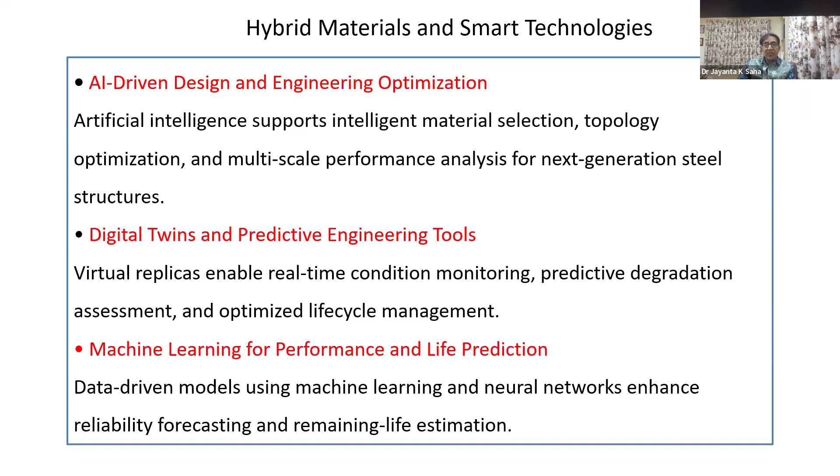Continuous development is happening for the design team to find the best material for infrastructure or other allied areas, and it is more in the aerospace and automotive industries. In the research and industry outlook, there is increasing demand in infrastructure, where more and more composite or hybrid systems will be used, and steel-composite hybrids are gaining importance.

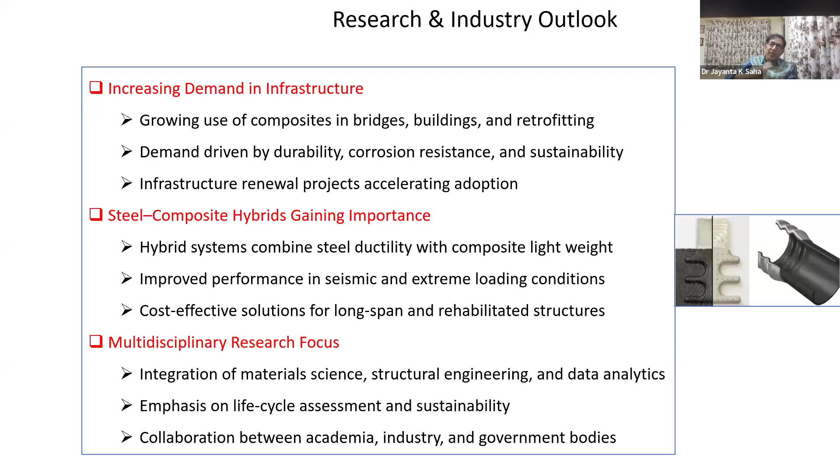And this is not only the job of the metallurgist or the mechanical engineer. It's a multidisciplinary research focus: integration of material science, structural engineering, and data analytics. These are some of the areas where research is going on and can be taken up. So these are the future trends.

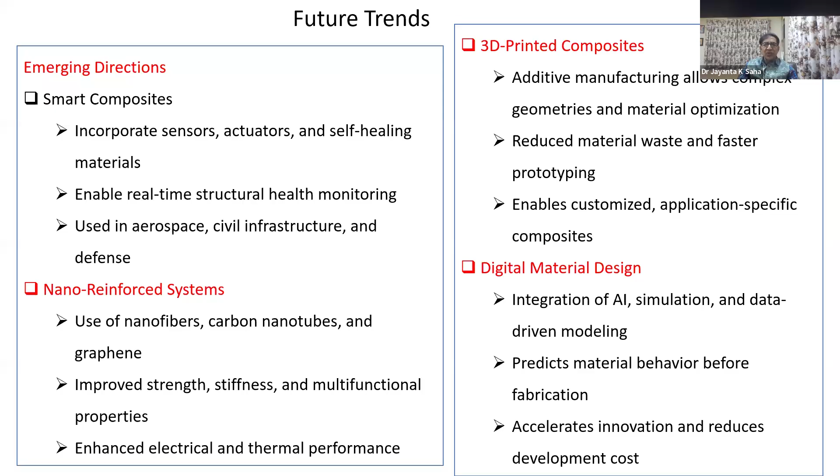Nano-reinforced systems, digital material design, these you must be knowing. Only thing is, things are changing very rapidly. Maybe 10 years back we had certain materials and industrial practices, but today, because of the availability of AI and machine learning, all those things have been changing very fast. So material evolution is also not in the back seat; people are taking advantage.

So I think I have covered more or less. It is almost 7:30, so maybe the next speaker will be waiting.

So I conclude: for steel to stay relevant in the future, it must evolve with emerging materials and intelligent technologies. The final conclusion is that composites redefine engineering possibilities, steel remains indispensable, and the future lies in hybrid and smart materials. We are talking about self-cleaning and self-healing materials, where corrosion issues will not be there, and that technology is evolving continuously. Only thing, the technology has to be cost competitive and cause no nuisance to society. Those are the areas people have to look into.